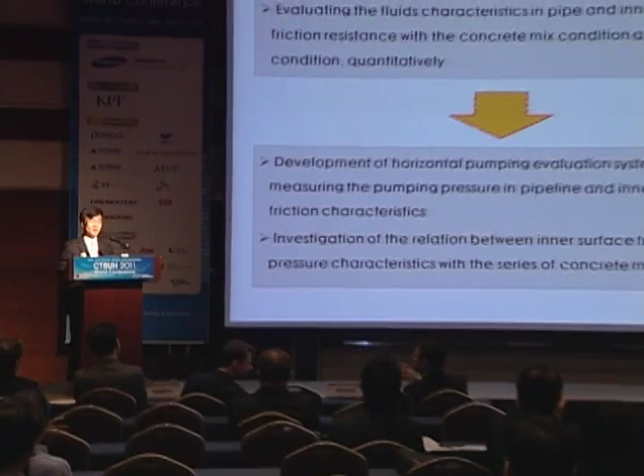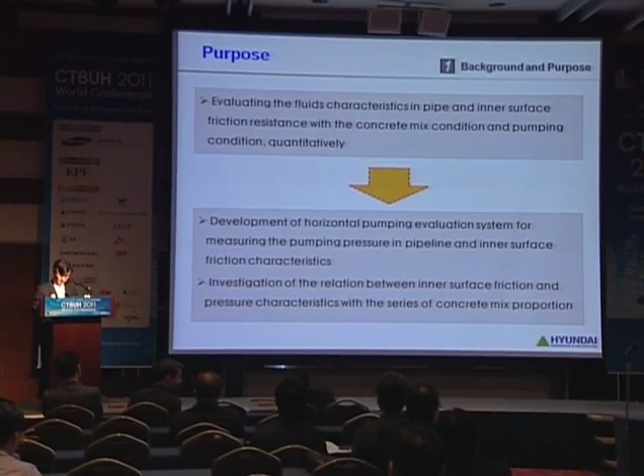So it is necessary to establish an economic evaluation and prediction method to optimize pumping conditions for high-speed construction. And it is essential to use the rheology approach to evaluate and predict pumpability in regard to fluidity, viscosity, friction resistance, and segregation of concrete.

For this research, a method of measuring the pumping pressure and inner surface friction resistance was developed for a pumping evaluation system. And the relation between inner surface friction resistance and pumping pressure with a series of concrete mix proportions was investigated.

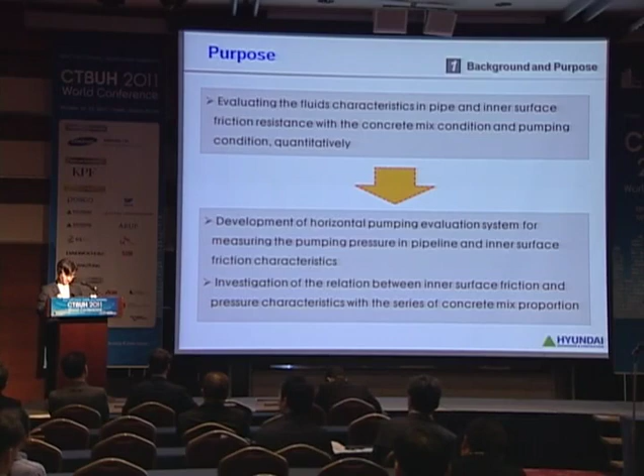In this chapter, I will briefly introduce the basic principle of friction resistance and flow of concrete inside pipe. What are the characteristics of fresh concrete flow in pipe? Concrete is a liquefied solid with yield stress and plastic viscosity, unlike an ordinary sticky liquid, so the concrete flow in pipe is very complicated.

Because of its characteristics, the loss of inner pressure with the distance from the pump is caused by the plastic viscosity of the concrete and the inner surface friction of the pipe. Especially, the inner friction resistance inside pipe is the most significant element for evaluating the pumpability of concrete.

Concrete flows inside the pipe by plug flow and slip flow. But when the plastic viscosity of concrete is high and inner pressure is high, a shear flow occurs due to the inner friction resistance. This shear flow is called Bingham flow.

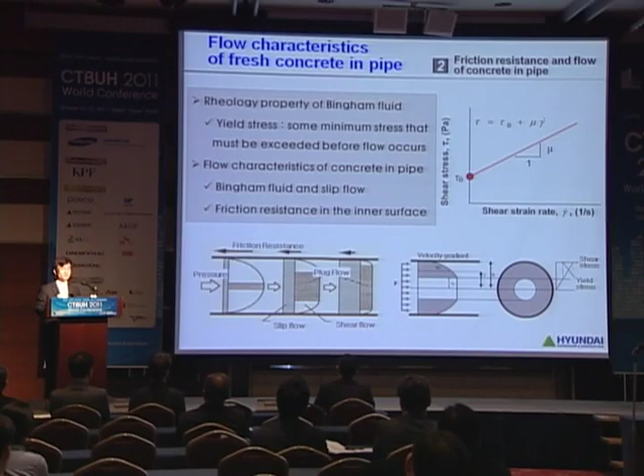Bingham fluid amount, including the plug flow, is influenced by plastic viscosity and pressure loss in pipe. As you can see, this is pressure loss in pipe, and this is plastic viscosity. Total fluid amount in pipe is the sum of Bingham fluid and slip flow.

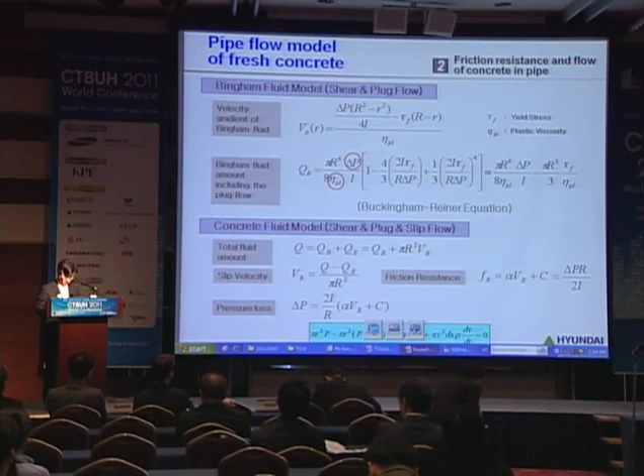In this regard, the Architectural Institute of Japan proposed an equation between slip velocity of concrete and friction resistance in order to calculate the pumping pressure loss. From these equations, the pumping pressure loss is predictable.

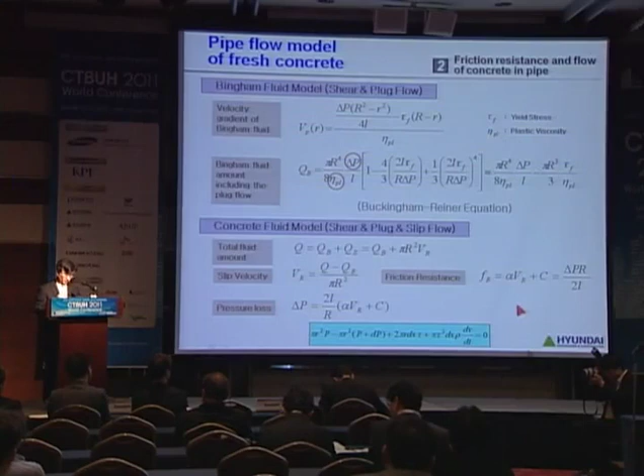The next is outline of experimental plan. First, experimental factors and levels.

To find the influence of concrete fluidity on pumping pressure, compressive strength and slump flow were set as factors for concrete mix condition, and pumping speed and repeated pumping elapsed time were set as factors for pumping condition. 4 levels of compressive strength, 40, 60, 80, and 100 megapascal, were applied.

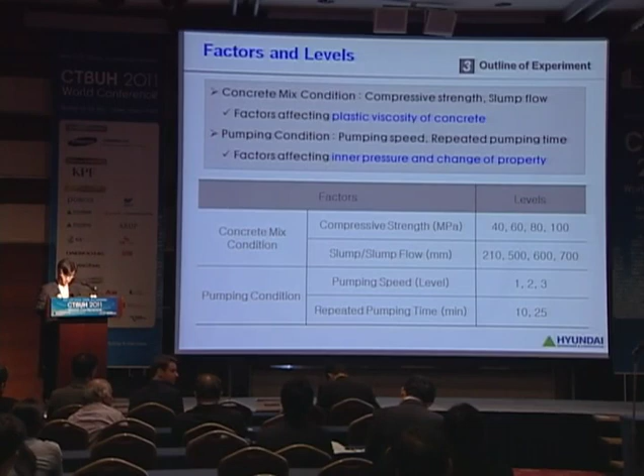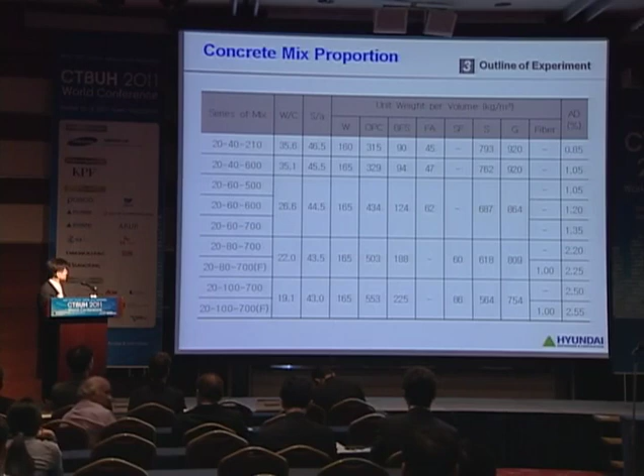Concrete mix proportion is as follows. A total of 9 series of concrete mix designs were classified based on target strength. In the series of mix, the first number, 20, means the maximum size of aggregate. The next number, 40 to 100, means compressive strength. The last number means slump or slump flow. And this F means fiber reinforced concrete.

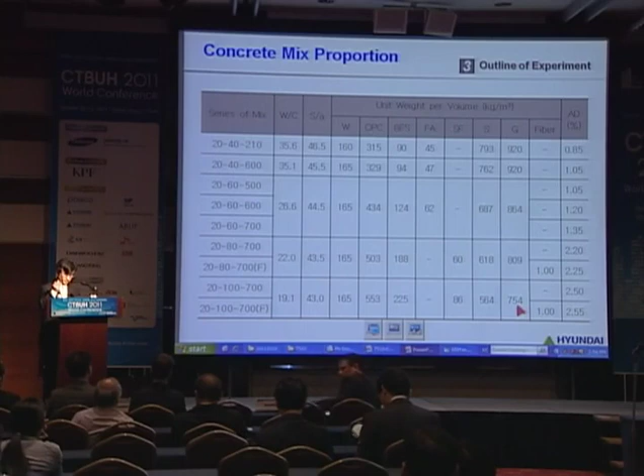Next, test methods for rheology. The Brookfield Company's DV-III rheometer was used in the rheology test. Shear stress and shear strain rate was calculated by torque of spindle, which was measured by gradually increasing the spindle rotational speed in a sequence of 50, 100, 200, and 250 RPM, and then decreasing.

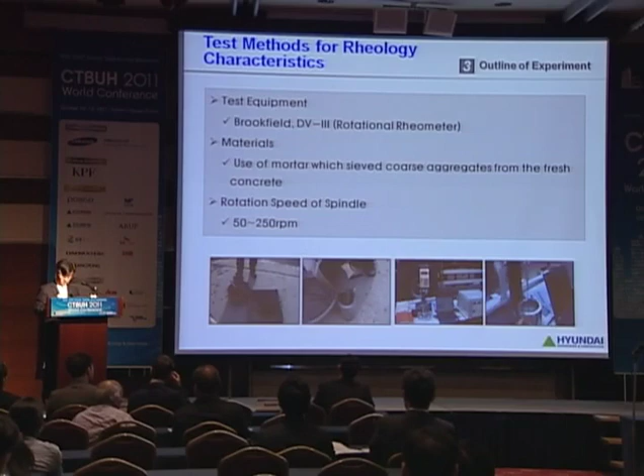The mortar used in the test was taken from the concrete before and after pumping by extracting coarse aggregate by sieving.

Next, test methods for pumping trial. A pumping performance evaluation system, as shown in this figure, was developed to measure pumping pressure in the pipeline and inner surface friction resistance. Using this system, pumping characteristics with mix condition and pumping condition of concrete were investigated.

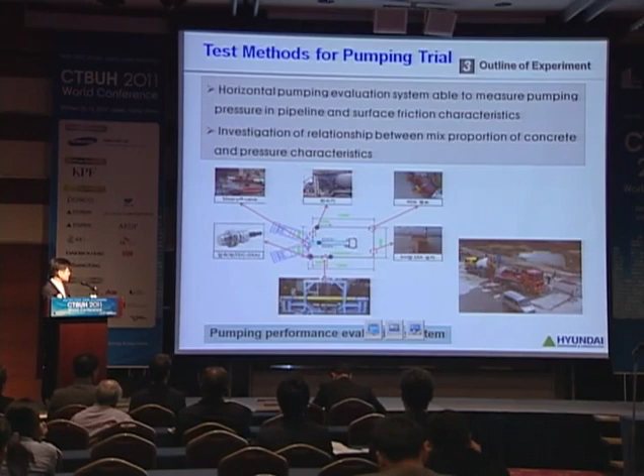The length of pipeline was about 50 meters. This is the pumping evaluation system, and this part is the testing pipe.

Next, test methods for inner friction resistance. This figure shows test equipment for evaluating the inner friction resistance.

with the pumping condition. The test pipe can move freely due to the two slip joints. When concrete is passing through the test pipe, force acting on the test pipe was measured by a load cell installed outside. These are the two end slip joints, and here is the load cell.

And when concrete is passing through this pipe, it can move freely in this longitudinal direction.

From this F, inner friction resistance stress can be calculated as shown in this equation.

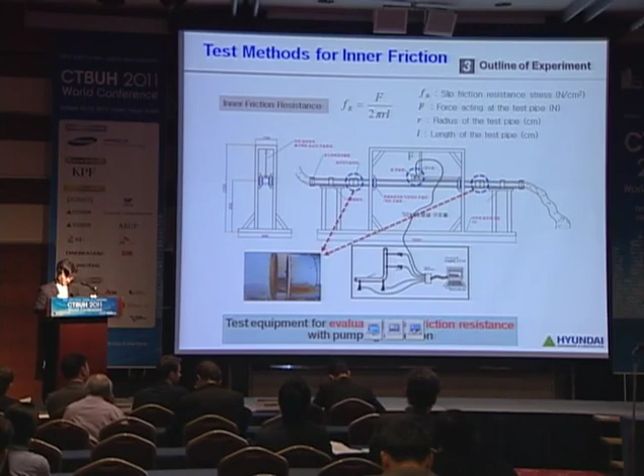The next is results of experiment. First, rheology property of mortar.

The upper figure shows the test results of plastic viscosity and yield stress of mortar according to concrete mix conditions. Generally, higher strength concrete shows higher plastic viscosity and yield stress. At the bottom of the pictures, the result of measuring rheology before and after pumping shows a general tendency of decrease in yield stress and plastic viscosity after pumping.

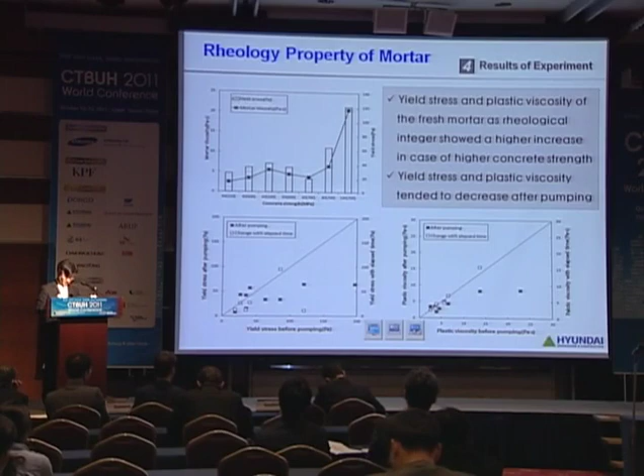In the pumping, with the same concrete mix, the pressure in the pipe tended to be bigger with the increase of pumping speed.

Pressure and friction resistance under repeated continuous pumping showed a tendency to decrease with time. In this graph, the x-axis is elapsed time, and the y-axis is pressure in pipe and frictional resistance, respectively. This part is pressure in pipe, and this y-axis is friction resistance.

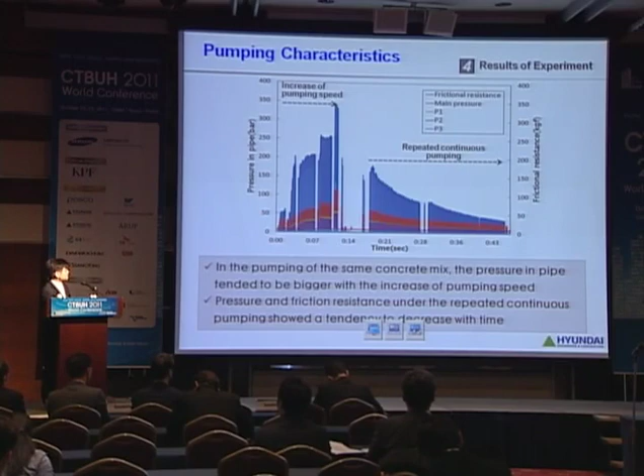This figure shows the relation between pumping speed and pumping pressure. In this graph, the x-axis is discharge rate of concrete as pumping speed, and the y-axis is pumping pressure and friction resistance. Pumping pressure and friction resistance tended to increase with the increase of pumping speed.

From this result, it is considered that the increase of friction resistance is related to pressure in the pipe.

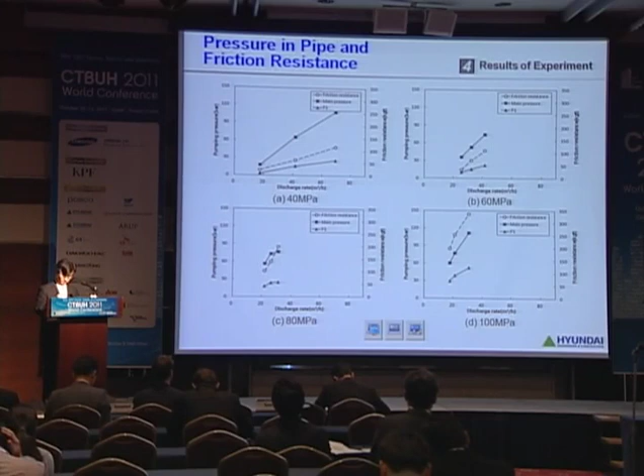Pressure loss in pipe tended to increase due to the increase of friction resistance with the increase of concrete strength, under the same pumping speed. In this graph, the x-axis is discharge rate as pumping speed, and the y-axis is pressure loss in pipe.

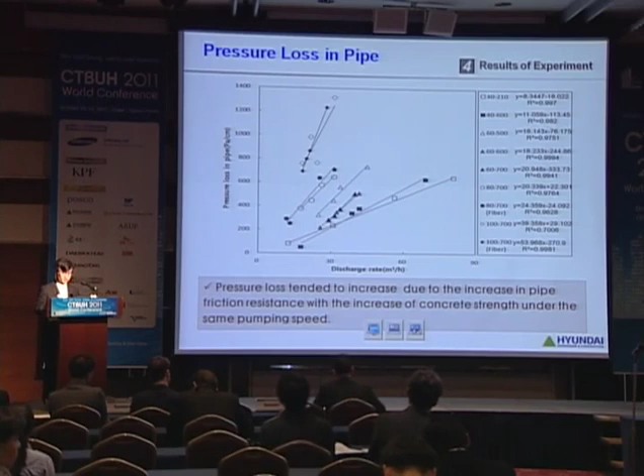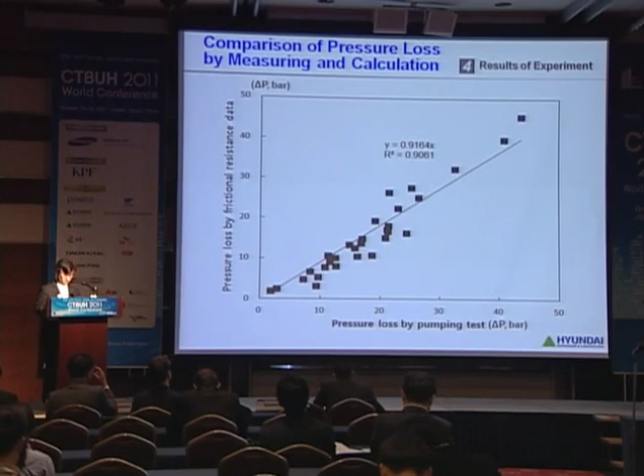Finally, conclusions. The conclusions of this study are as follows.

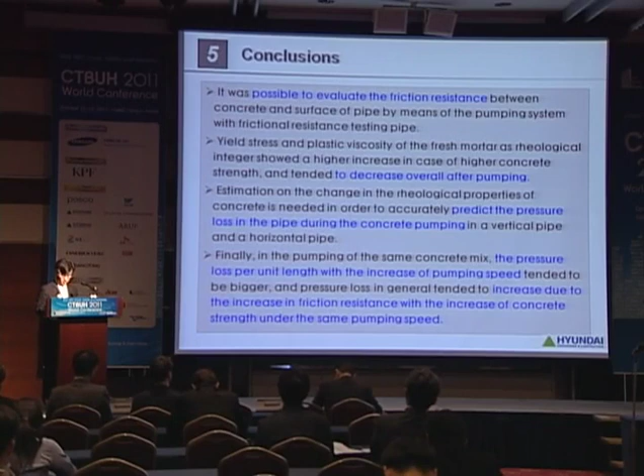It was possible to evaluate the friction resistance between concrete and the inner surface of the pipe by using the pumping evaluation system with the friction resistance testing pipe.

Next, yield stress and plastic viscosity of the fresh mortar showed a higher increase in case of higher concrete strength, and tended to decrease overall after pumping.

Estimation of the change in rheological properties of concrete is needed in order to accurately predict the pressure loss in pipe during concrete pumping in a vertical pipe and a horizontal pipe.

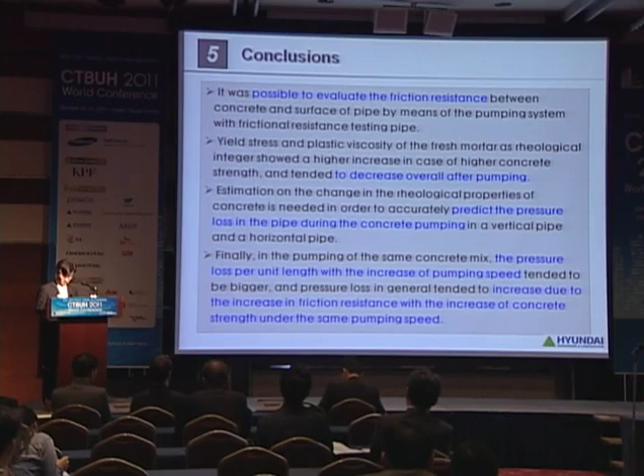Finally, in the pumping of the same concrete mix, the pressure loss with the increase of pumping speed tended to be bigger, and pressure loss in general tended to increase due to the increase in friction resistance with the increase of concrete strength under the same pumping speed.

Thank you very much for your attention.

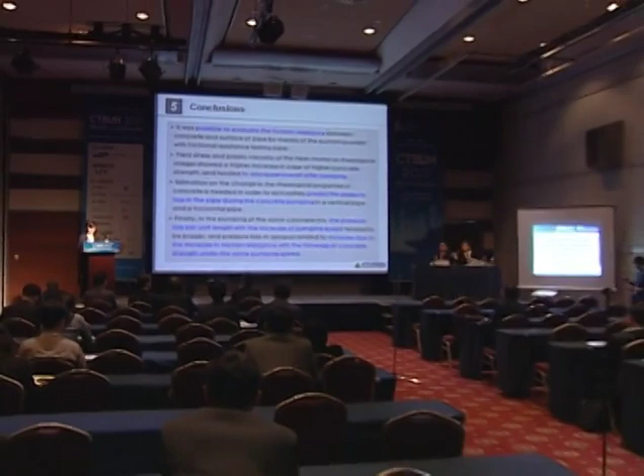I have one question for you. If you go back to your presentation for the inner friction formula, you have the inner friction formula. Yeah, if you go back to that formula, please.

F over 2πrl. Maybe you mean this part? Yes. Exactly. Does it relate to the height from the surface?

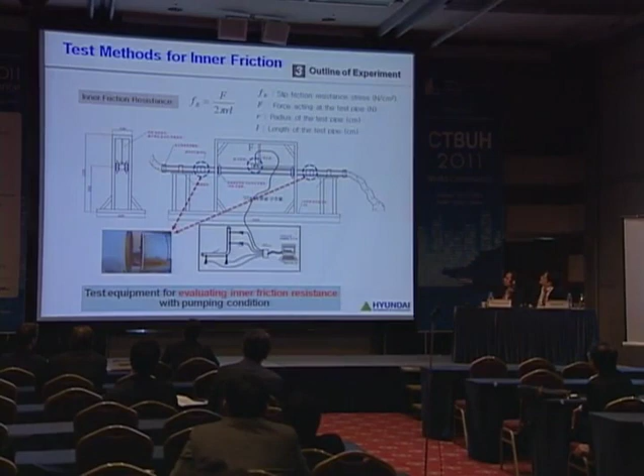You know that you ran the test for the pipe, yes? And if you look at the inner friction resistance formula, does it relate to the height or not? The height from surface to pipe.

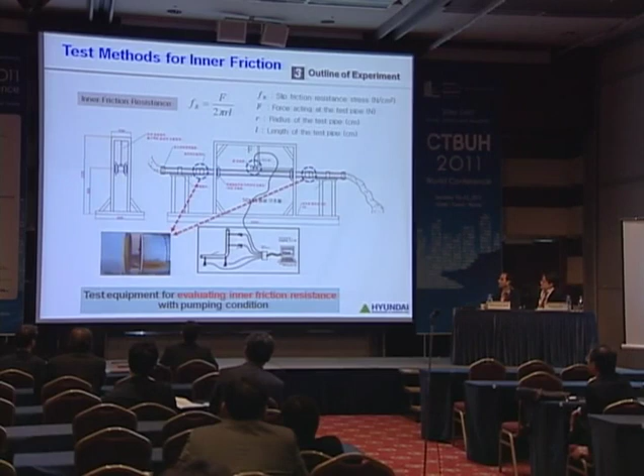Inner surface of the pipe. Inner surface or outer surface? No, inner. Yes. Does it relate to the height?

If you change the height, will it change or not?